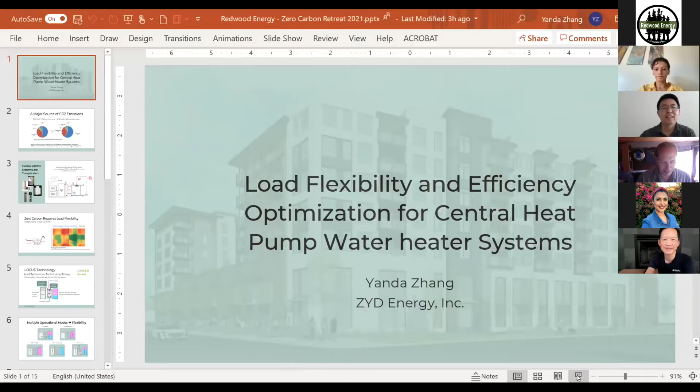Okay. Yanda Zhang, Dr. Yanda Zhang, is the CEO and founder of ZYD Energy Incorporated. ZYD Energy provides advanced control solutions for water heating systems to achieve load flexibility and efficiency optimization. Yanda has more than 15 years of experience in the energy efficiency industry.

I saw him present in 2013 and he blew my mind at the Hot Water Forum. I've been following him ever since.

Previously, he worked as a technical director at HMG and TRC, leading and managing consulting projects in building energy science research, technology assessment, codes and standards development, program evaluation, and policy analysis. Dr. Yanda Zhang. Woo! Well, thank you for the introduction.

It just speaks of that when you're working for, especially at the beginning, a relatively small consulting company, you just have to do everything, no other choice. So, just to add a little more to your introduction: actually, before that, I was working for GE, General Electric, not working on their water heaters, but on power plants.

You know, when I joined the energy efficiency side, people always joked that I came from the dark side. But that might be too much, but I definitely enjoy my later career in energy efficiency more than my power plant world. So. There was a time in your life, it was good. We're all glad we have power plants, but I think what you're doing here is excellent. I mean, taking the knowledge of the importance of grid flexibility and what you learned from power plants and doing it now. Yeah, anyway. So it's all related to power.

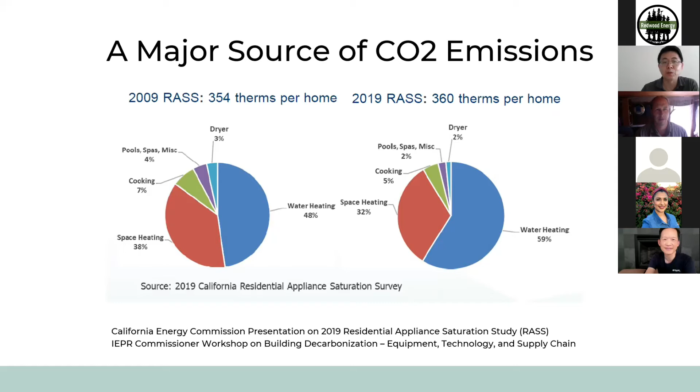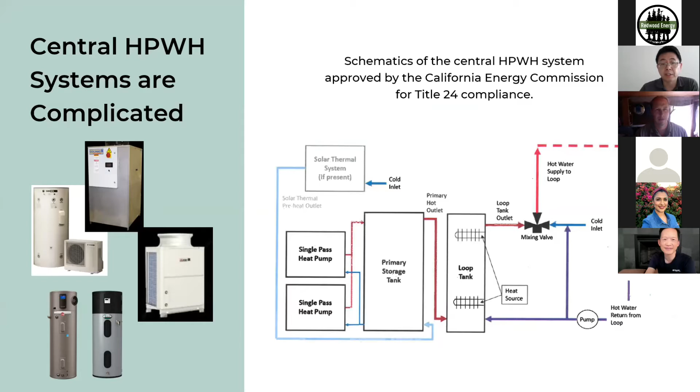Just to design a central heat pump water heater system itself is already challenging, but the next level is to make the system achieve load flexibility to reduce impact on the grid. We all know the duck curve, right? The key point is that we need to avoid usage during the peak. Not only that, if we want to truly achieve zero carbon, we also need to align water heater operation with the carbon intensity of the electricity supply.

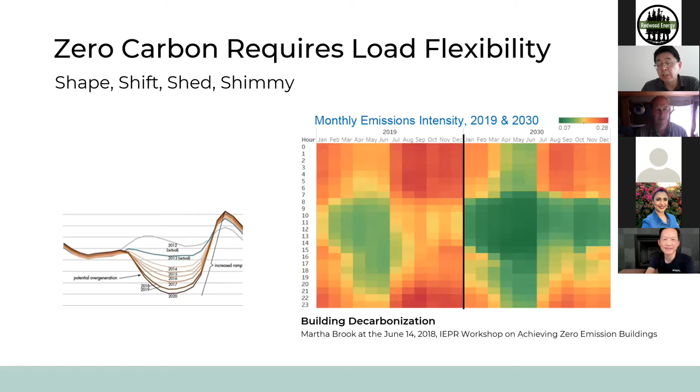This is a high level overview of what is expected 10 years down the road. Yes, our grid is definitely going to get cleaner. All the green squares represent times when we have low carbon electricity supply, but we still have many hours with relatively high carbon intensity electricity supply. So we need to avoid using that electricity. That means we have to control heat pump water heaters at a really granular level to align with electricity supply carbon conditions. Okay, so that really calls for better controls.

So I'd like to introduce our technology. We think there's going to be a lot of technology available, and this is hopefully going to be one of the ones contributing to the cause, right? So the technology is called LOCUS Technology, which stands for Load Optimization Control Using Storage. Previously, we called it Thermal Storage Control. It sounded too generic, so we came up with this new acronym.

What's the key difference here compared to what we already have, right? What we have today in terms of dealing with load flexibility is what I would call temperature control. Before the peak hours, you increase the set point of your heat pump water heater. So in a sense, you supercharge the heat pump water heater to store high-temperature hot water, so that during the peak hours you would have more than enough, hopefully, right?

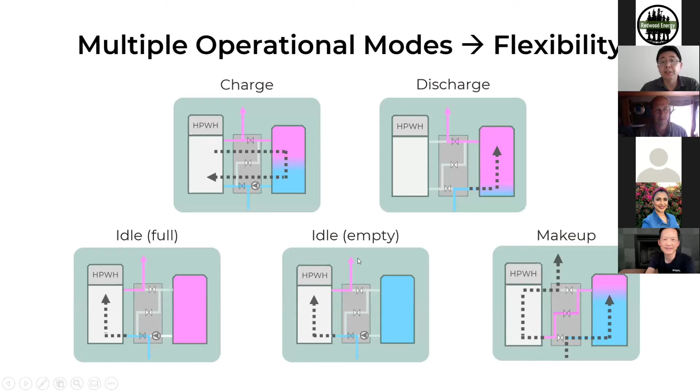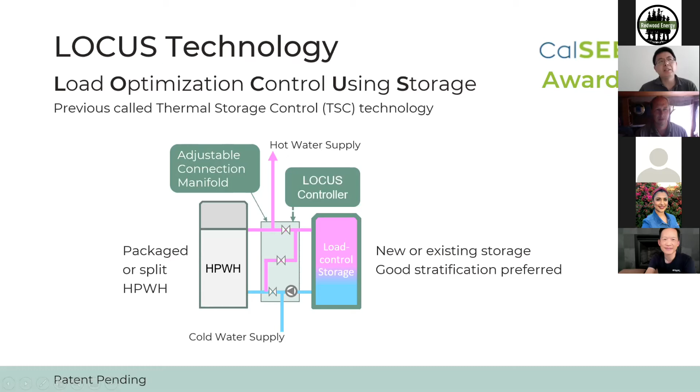Also, our control, let me go back to the previous slides. It doesn't have any particular requirement on the heat pump water heater itself because it triggers the operation by putting cold water into the heat pump water heater. It doesn't need to change any temperature set point, doesn't require the heat pump to have any special control, right? So therefore, we can use it for all heat pump water heaters. We can use, this is what I'm going to talk more about, we can use it for central heat pump water heaters. And so far, I have not heard about any scheme using temperature control for central systems.

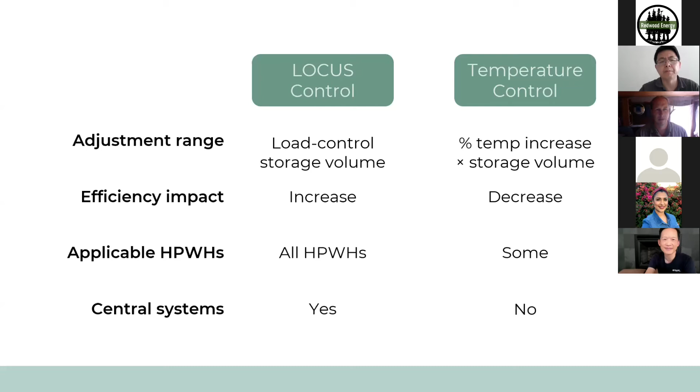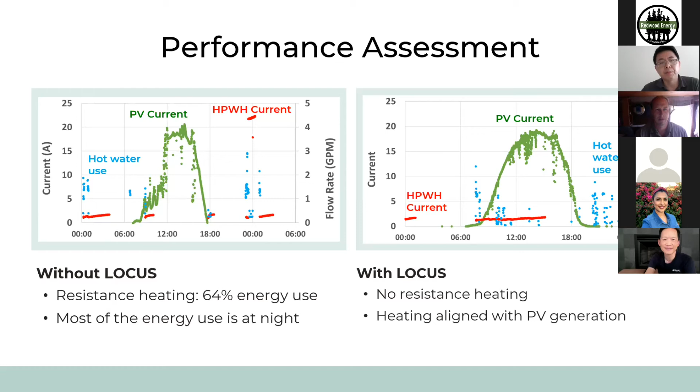And from a system integration point of view, we also have an IoT-based database system connected to our control, allowing us to further connect to grid control signals, so that our optimization software can use, say, real-time electricity price and electricity carbon intensity values to perform operation optimization.

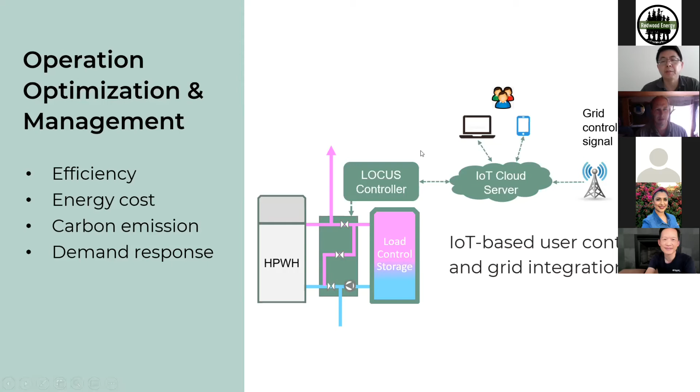So now we really get into the central system, right? What we showed is really the basic concept of the LOCUS control. So what can we do for central systems? Step one, I'm trying to show you that this technology can be scaled up for large systems. Instead of one heat pump water heater, you can have multiple ones in your system. You could have multiple storage tanks, right? We just have more connections, such that each heat pump water heater can be individually controlled and connected to the storage.

And at the same time, you can see that if we put all the connections in a packaged unit, for example, like this, the system configuration and connection is actually greatly simplified. All you need to do is connect your hot and cold to the corresponding ports of this control box, and connect the storage hot and cold to the storage side of the connection, and your city supply and hot water supply. Therefore, it makes your system design and installation pretty simple. You just need to get them connected. The control will optimize operation for you.

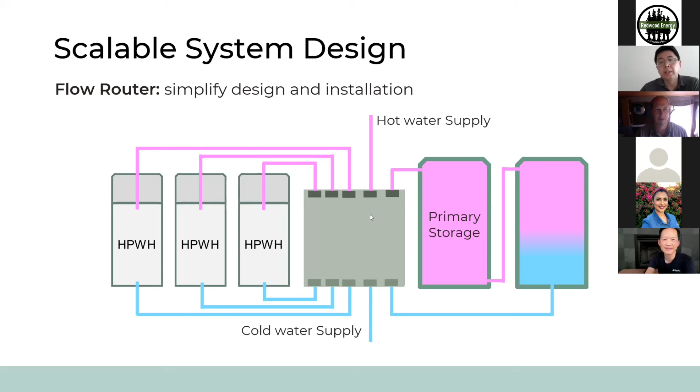Next step, let's look at realistic systems: our central systems oftentimes include a recirculation loop. This has been to a degree a headache for central heat pump water heating systems, especially for heat pumps designed for single pass operation.

Those heat pumps do not like lukewarm water coming back from the recirculation loop, right? Just to interject, people: single pass, an example would be the Sanco2 carbon dioxide heat pump water heater that Wei Tai showed on his house. That's a single pass. It doesn't want warm water coming back, versus other heat pumps that can handle that, like a 10-degree temperature difference. But sometimes it comes back only 1 degree different, which messes up any heat pump. Doesn't matter what it is, just 1 degree temperature difference between going in and going out.

Yeah. So this is very helpful to emphasize. Yeah. Sorry, I didn't have time to go into all the technical details. You did a great job.

No, great job. Yeah, single pass, but one thing to add on: single pass heat pumps are great. They have very high efficiency, much higher compared to multi-pass heat pump water heaters, especially the CO2-based heat pumps. They use single pass design. And so it's critical that we should have systems able to use them, right? So how do you deal with that?

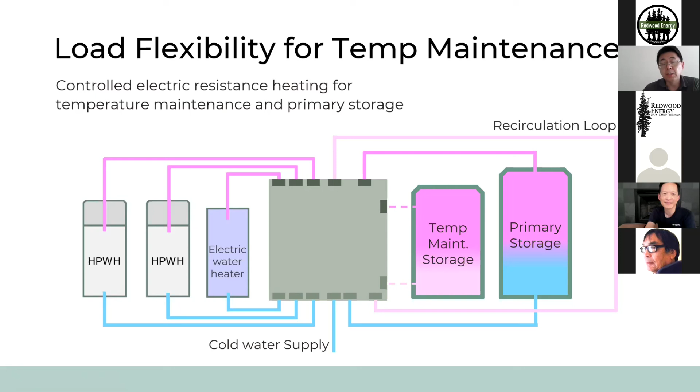And again, it has been complicated for people, but with this control, we can also make it simplified, right? Again, we put all the control connections into a package such that all you need to do is connect the plumbing, from a design point of view and an installation point of view. So let the control do the proper operation and optimization and load control for you, right?

Same concept: if you have solar or even gas water heaters, how do we integrate them? For existing buildings, you may not be able to remove your gas water heaters completely for various reasons. For example, you might want to use just one gas water heater as a kind of peaker to deal with the large demand. You don't have to size the heat pump to be very large, so you can save costs, right?

So again, same concept. We can help you integrate things together. All you need to worry about is the overall capacity you need and the overall storage size you need, and we get them connected and running properly.

And you're at 3 o'clock.

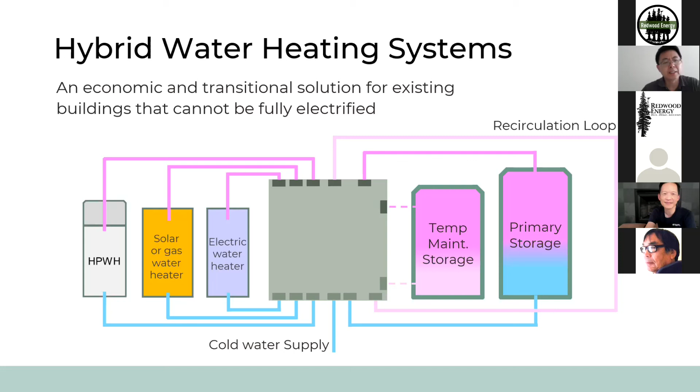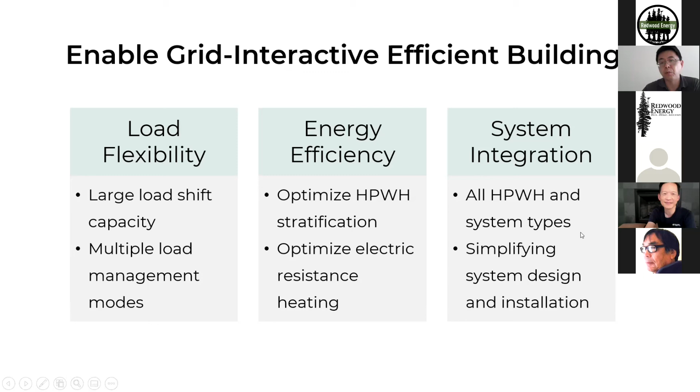If you could. Yes. So, pretty much my summary: the technology aims to achieve 3 things: load flexibility, energy efficiency optimization, and system integration, right? The key is to make load flexibility available for all types of heat pump water heaters and system designs. That's all I have.

Thank you. Brilliant. I hope everyone hears that. That's a very helpful presentation of idealized thermal storage. I don't know if, Yanda, you were able to see Dre Helms at the beginning of the day, but they were talking about some of the same issues you're dealing with, but from the phase change material perspective, how to get that kind of storage. It's been a really good day for those kinds of presentations.